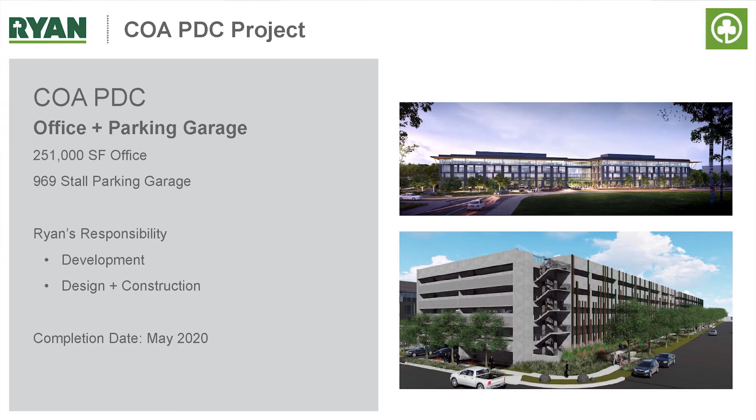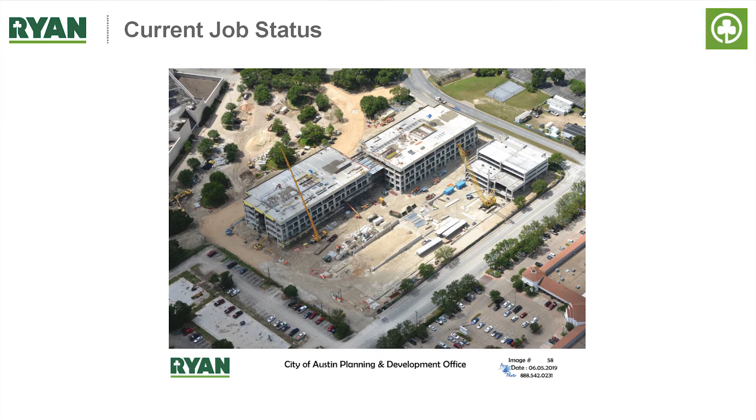The Planning and Development Center is about 250,000 square feet with a 969 stall parking garage. Again, we are a developer, design, builder, tracking for completion and sale to the city at the end of May 2020. In this photo here, you can see our current status. The office structure is complete. We're working to enclose the building, keep all of the rain out for now. And then we're also starting to erect the precast structure.

So about our system. When we first started the project, Austin Water expressed interest in incorporating the Blackwater system into the project. We sent out an RFP. The criteria for that RFP was a 5,000 gallon per day system. We wanted to recycle toilet water and reuse it for reflush. The goal was to reduce potable water consumption by 60 to 70%.

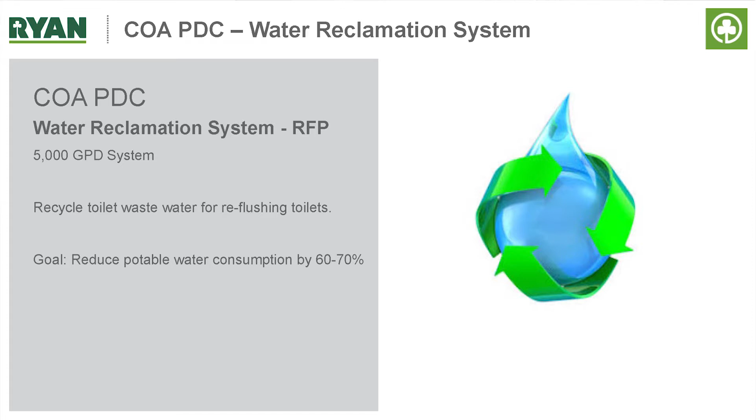So, I've never done one of these before. It was a unique process for me. We sent out an RFP, kind of shot it out there to who we could find, and found what we got back. So we got some vendors that were going to provide kind of a kit of parts design, and, hey Ryan, you guys go out, you buy all this stuff, assemble it, and hope it works.

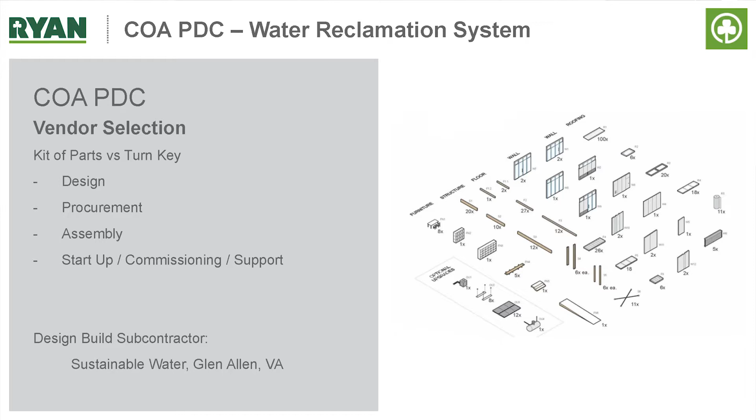We also got some other bids from more turnkey vendors, a design build approach, where they would design the system, procure and assemble all the materials, deliver it to site, and help us with startup and commissioning. And that's the path we went down. We ended up selecting a vendor called Sustainable Water out of Glen Allen, Virginia. So far it's been a great process. I've learned a ton, and we are about halfway into production of our Blackwater system right now.

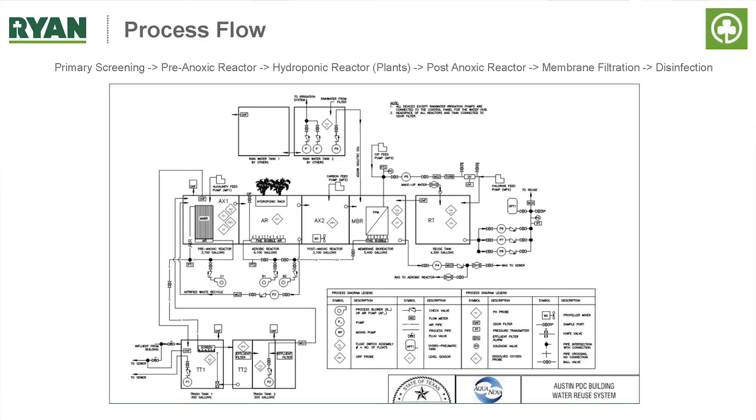So exciting times. This is the process flow diagram that Sustainable Water came up with, and just a disclaimer, I'm confident that most people in this room know more about this than I do. In our process, we go through a primary screening to get the solids out of the water, go into a series of tanks, pre-anoxic, hydroponic, which is my favorite because it has plants growing in it, post-anoxic, and membrane filtration, and then through a disinfection system into a day tank that sends it back to the building for flushing. So we got through this process flow, that's great, but what does this thing look like? And where are we going to put it?

So next I'm going to tell you about how we incorporated it into our project. So where does it go? We're maxed out on parking. We're maxed out on office square footage. We can't take up any of that. So we spent a lot of time trying to figure out where to put this system.

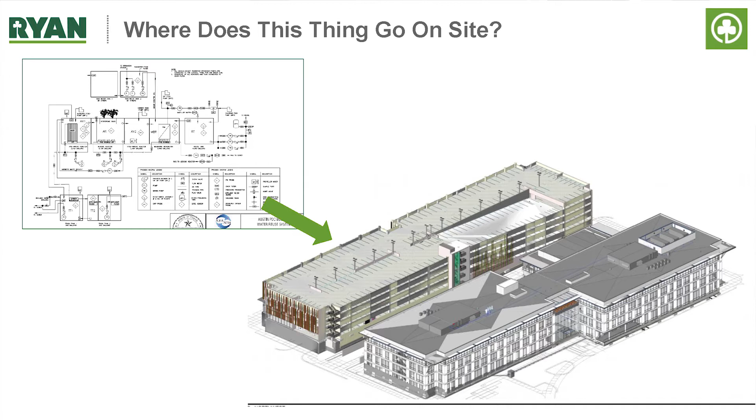Some of the considerations and opportunities we were up against: the system is about 40 by 40 feet. How do we conceal it yet make it visible so that Austin Water can market this system in the future to other developers? We need to consider future maintenance and operations of the system. Do we put it in the ground or above grade? And also schedule. If we put it in a spot where we're waiting on the system to come to site, that does not allow us to continue building the actual building we need to. We had to factor that in. How does the schedule impact our project?

So our outcomes from those discussions, we decided it was best to give the system its own space. Let's not try and shove it into a closet and make the system fit our building. Let's give it its own space. So we decided to locate the system above grade, outside of the office and parking structure. We decided to prefabricate the system off-site as much as we could.

And you can see here in this photo, we basically have a mechanical building, prefabricated, and all those tanks I described that do the magic process of recycling the water. Two separate buildings interconnected together. The pumps and skids are in the mechanical building that feed into the tank building.

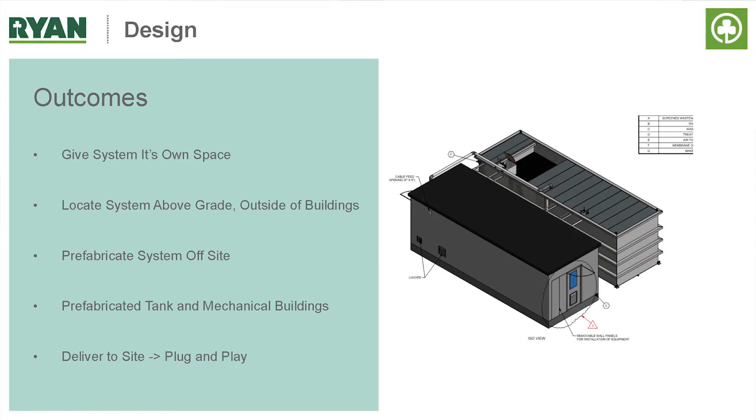So prefabricate, we're going to deliver it to site, drop it in, and hook up our sanitary or water lines or electrical connections. Basically like a plug and play system. It's very fortunate. I'm glad we were able to make this work this way. We get to assemble this thing off site in a controlled environment, make sure our quality for this system is as high as it can be, and bring our utilities to a specific point and connect once it's on site.

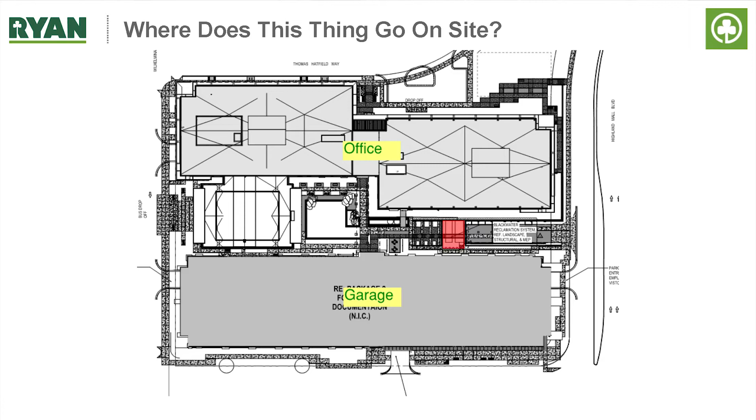So where did we land with this location of the system? We ended up locating it in the courtyard between the office and garage, in a location where visitors can see it. We'll walk down the fire lane over a bridge over the system, look down at the system, look down at the plants that are helping that biological process of recycling the water, and then continue down into the main courtyard area of the building.

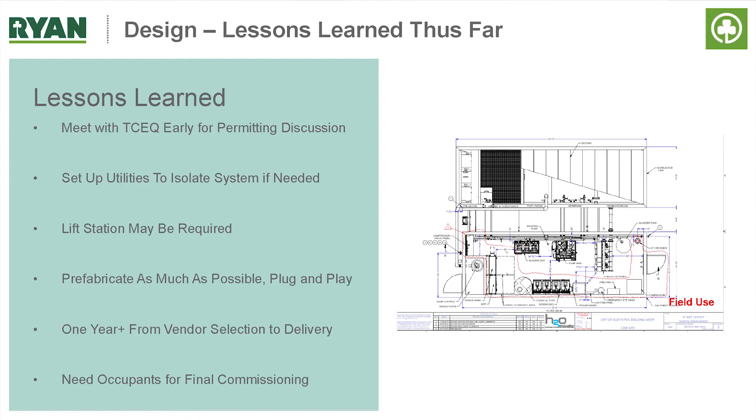So some design lessons learned so far. Meet with TCEQ early and often. Determine your permitting process. Depending on the end user, it can be a long process, but fortunately, working with Kevin and Catherine, we were able to meet with TCEQ early on in the project and outline our permitting process. We are currently in process of our TCEQ permit review and hoping to get that sometime next month.

Second lesson learned, set up your utilities so that you can isolate the system. In case the system ever goes down or needs maintenance, we've installed some valves in our sanitary system that we can valve off the system, isolate it, send our sanitary to the normal sanitary sewer so that we're not 100% dependent on this system to shed sanitary off our site.

Third lesson learned, a lift station likely will be required. Because we decided to locate this above grade, our sanitary comes into a lift station, which also serves as our primary screening, and pumps it into the system. If we had done this all by gravity, our system would have ended up about 20 feet below grade, where it's not visible, it's hard to maintain, it's hard to operate.

Prefabricate as much as possible is my words of advice. It's been a blessing that I don't have to teach a plumber who's never done a blackwater system how to put it together. I've got experts at an off-site location putting this together for me. It's been about 1 year from the time we selected the vendor till the system will show up on site. So again, some long lead here. Meet with TCEQ early and select your vendor early.